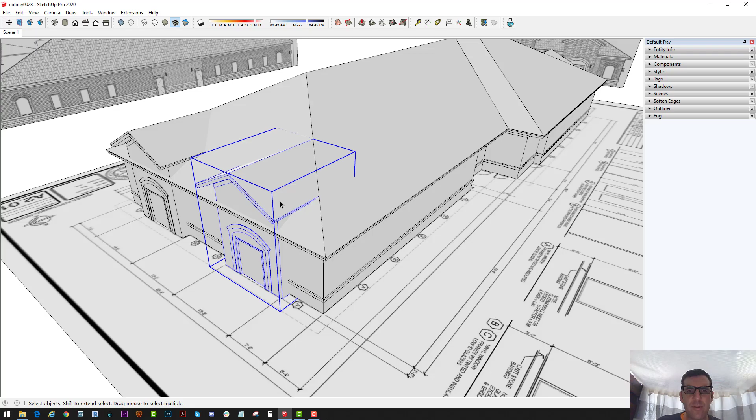Okay, so the first thing we're going to do in this part of the tutorial is clean up this part of the roof right here where this roof meets the other roof. Let me pull out View, Toolbars, Large Tool Set, pull it over to the side, double click.

So what I'm going to do is select this and select the Move tool, click on this face, get it going in the red axis, and hold down Shift to lock it - or the green, I mean - then hover over this face to snap that face together so that they're in line with each other.

Then I'm going to double click inside this component, use the line tool to draw and trace that. Might have to hover and hold Shift and snap it. I want it to cut, hover on this line, hold Shift, and snap it there. So cut that.

And then I'll do it for this side too. Hover on this line with the line tool, hold Shift, then hover on this line, this face. And it's doing it to all four of them. I'll just have to move those over where they need to go after I'm done.

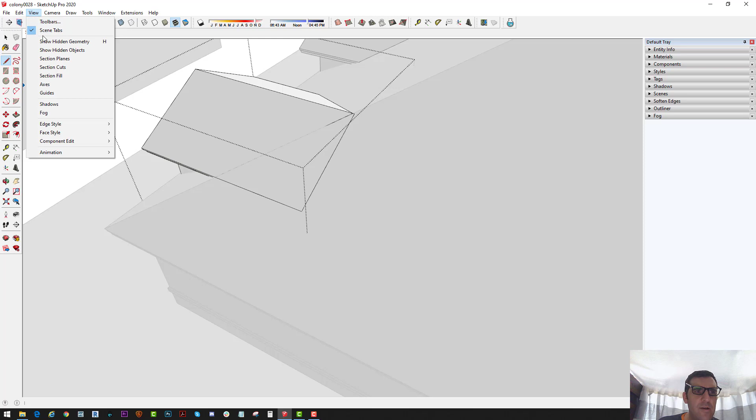The issue is I want to cut. For now, I think that's enough. So I want to be able to see back here, so I'll go to View, Component Edit, Hide Rest of Model.

So I'll just use my eraser tool to erase this back part. And then the roof should line up, and I'll click that again - View, Component Edit, Hide Rest of Model - to get it back. So I want to delete that line too.

So let's see here. This isn't lining up exactly correct, but it's pretty close. We're gonna call it good for now. We'll just hide this line, then hide this line for now.

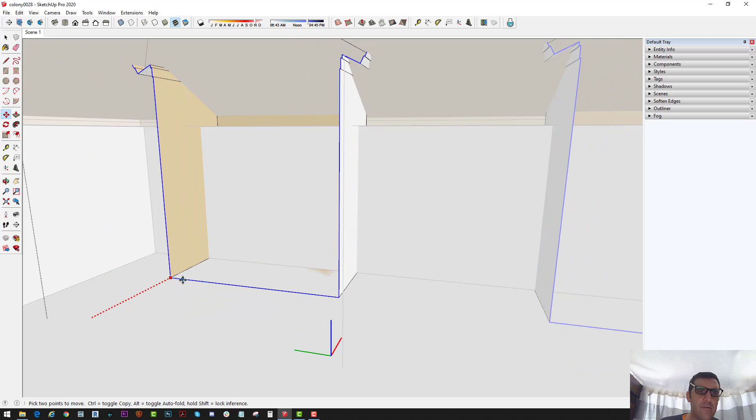We can select these and just pull them in a little bit with the Move tool, just so they're not sticking out so much in the building. Okay, so I want to pull these over to match as much as possible on that one. These, we'll probably just leave them where they're at because they don't need to line up with the roof.

So we do need to cut these roof parts out on all four of them. The best way I found to do that is to take this roof group, double click so that I'm inside the roof, and then draw a box - just draw a box like a square, then use the push-pull tool.

Now what I want to do is turn that into a group. So triple click, right click, make group. And then I can use the scale tool, select tool, scale tool, to just move that into place.

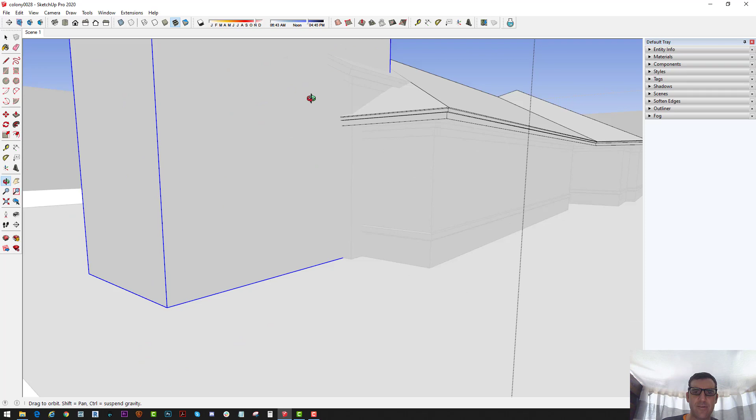So I can start cutting out these chunks of the roof that I don't want to be visible. And I'll just snap it to the edge of this element right here. There we go.

And then, since they're all the same size, I should be able to hold down Control, move a copy over here, and then do it again. Move, hold Control, and just put a copy over here, pull it out a little, and do one more copy. Move, hold Control, move a copy.

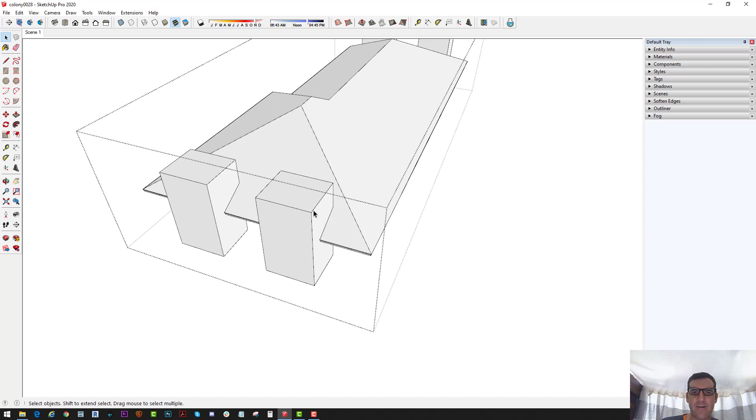So now, if I go to View, Component Edit, Hide Rest of Model, I just have my 4 blocks. I'm just gonna select all of these - the roof and the 4 blocks - right click, say explode, select everything again, and do right click, intersect faces with selection. So now it cuts those boxes out, and all I have to do is select it and delete them.

Delete all those extra faces that I don't want. Either select them and hit delete on the keyboard, or just use the eraser tool to erase the extra lines and faces that are not necessary.

It's like a Boolean operation, I call it, but I've noticed that if I use the actual Boolean operation in SketchUp, it's buggy - they may have fixed it over the years - but this takes me like a few seconds to erase the extra lines, and it's never been buggy like the Boolean tools have been, so I just do intersect and then delete what I don't want, keep what I want.

And then click View, Component Edit, Hide Rest of Model to show everything again. And there we have perfectly cut out spots out of the roofs.

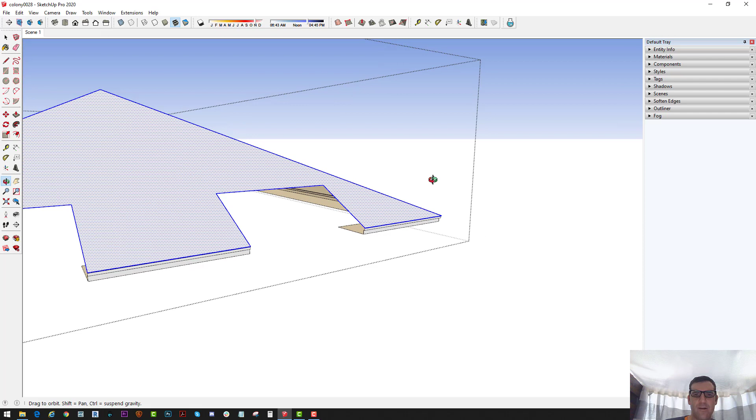We need to add back in these faces. All we have to do is double click on the roof, View, Component Edit, Hide Rest of Model, and use the line tool to just bring these faces - draw that extra line to bring these faces back to life here.

That's it. I don't think we need them on those ones. Oh, yeah, we do - it shows a little bit. So we'll bring them back over here too.

Okay, that part's done. So now we've got nice clean cuts in the roofs. All the elements line up the way they're supposed to.

We'll save it. That's the next version here. And we will move on to the next step, which is adding some extra modeling detail. So we have these roof vents, which are pretty much simple boxes.

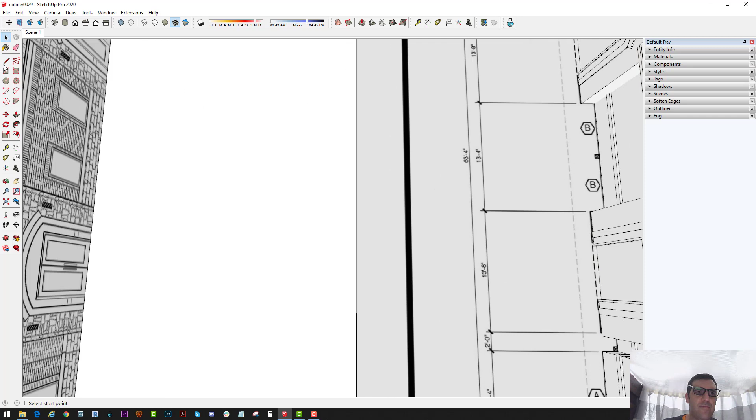To do that, just to keep it straight, we'll start off by drawing a simple box on the ground, push-pull it up, and then turn that into a component. Right click, select, right click, make component. Then we'll move it up to here to get the size correct. Move, rotate, scale, all that good stuff.

Just size it properly, and then do an offset, push-pull, eraser the stuff we don't want. That should be good. It looks like it needs to come down a little bit here in the top, like that. A little bit more. Okay.

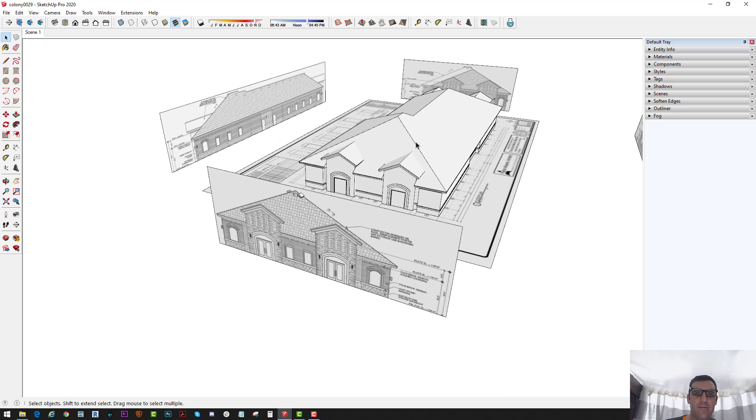Now we can see on this one where all those are placed at, but it's kind of hard to line it up. So what we can do is use the eyedropper tool. If we open up our materials window, if you don't have it, just go Window, Manage Trays, click on your default tray and add the materials. Then double click on the roof group, click on the eyedropper, grab this image, and click it over onto this surface. We'll do the same thing, grab this image, put it over here, so we can see where all those roof vents are supposed to go.

And then just move it over. I'll use the move tool, hold down Control and move a copy, and just keep doing that. But for this, I want to do an even array from here to here.

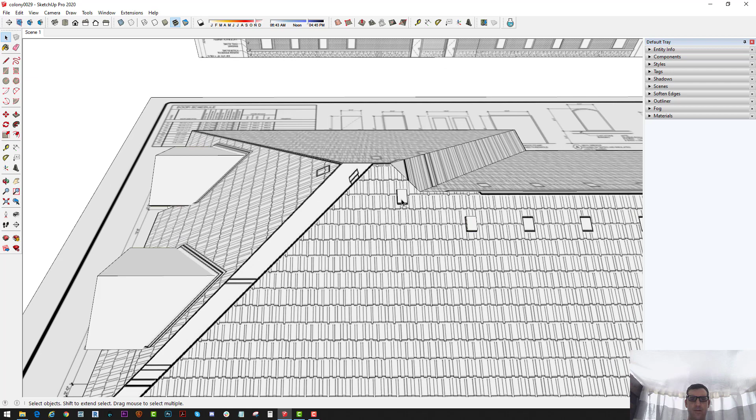Actually, this texture image isn't aligned correctly. Really, this should be over here. I don't know why it's not aligned properly. That should be centered, so really this should be over here. Oh well, I think if I just move this image over a little bit...

Double click on the roof, and then go back to the eyedropper. There, that's better. Still not correct. That's better.

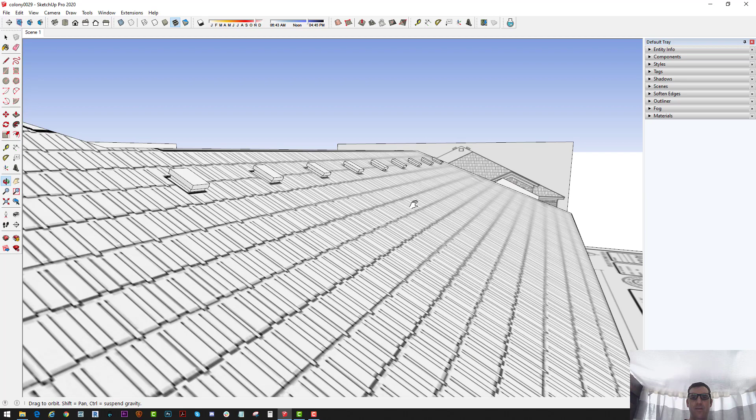So for an array, to get all these ridge vents evenly spaced, what I'll do is use the select tool, select that one, use the move tool, click once, hold Control, hold Shift to move it straight over, then click, and then type /8 enter. So what that does is take the space given between the first copy and the second copy, and divide it into 8 equal sections. So it's a copy array that keeps them all evenly spaced.

Now I'll just save it, because sometimes this next one crashes, but you never know.

So now I just want to copy all of those over to the other side. I'm going to select all of them, see if this will work. Just hold Shift, select, and then click on Rotate, and hover over the ground, hold Shift to lock it to that axis. Oh, it's not working. Let me see - I'll hover over this ridge line, click once, drag up to make it turn blue, then hover on this line, hold Control to do a copy, and copy 180 degrees. And then there, we've got them all copied.

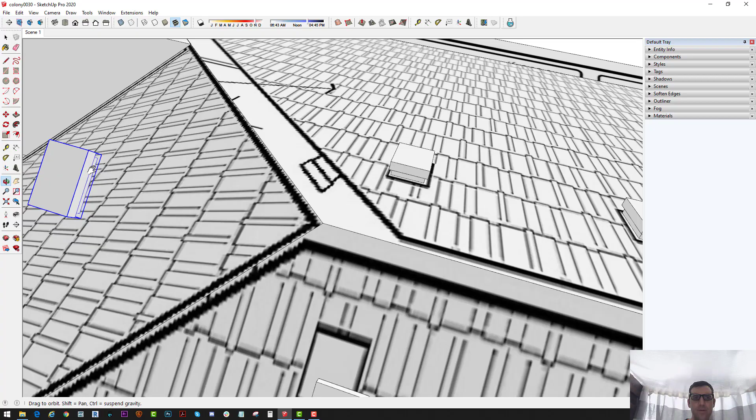And then I just move them into place. Should be even with the other ones. This should match this one. And then we need one more over here. Enter.

Move, hold shift, and then hover. This looks like it needs to move up a little. Okay, so we got our roof vent models done. Good enough, even though the drawings don't all line up perfectly. That's something we knew about already. It's okay, it's very close.

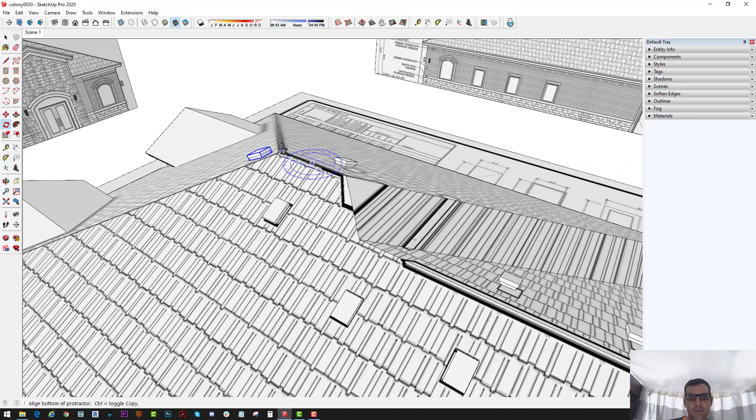It looks like if I look at this one, there should be another vent over here as well. So I'll use the rotate tool, click, hold control, 180. There we go. Okay, now we're good.

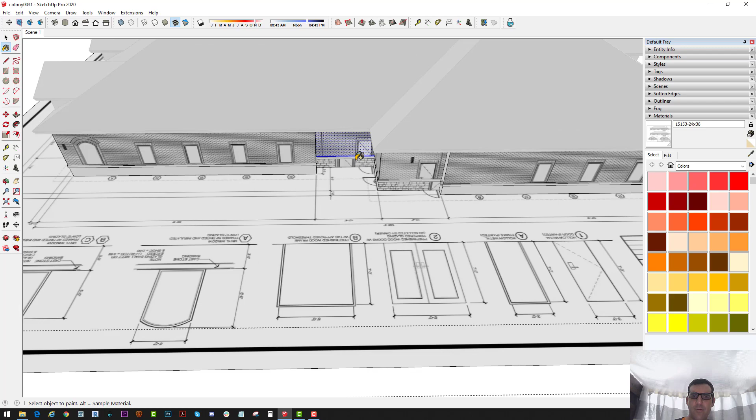That's just stone. It's a little bit messed up - oh, it's the wrong image. That's why. There we go.

Okay, so then I need to do these ones too, just so I can see where these lights are supposed to go. Yeah, looks good.

Okay, where's the light? So I can cut and paste this inside this component, and then it'll populate it onto all 4 components. Just move it into place.

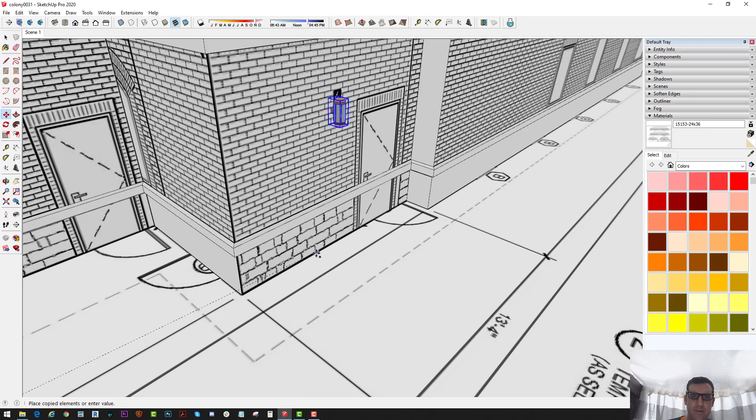Copy, because there's a few on the outside of the wall too. Rotate it 90 degrees, and then move it to snap onto the wall here with the shift key. I'm going to snap the height so all these heights line up, and then move it over to line up with the image. Then I could snap it onto the corner of the wall here, click Control to move a copy, and then just move it over and snap it onto this wall.

Just keep copying it around the building wherever it needs one. There's a couple here. Rotate, move, move, rotate, scale, move, rotate, scale.

Okay, oh, we missed one right there. Almost snuck by us, not so fast. And these don't line up, so I think it's actually supposed to be closer to the edge. Let's look at our other - yeah, this one's pretty close to the edge, so I think that one looks good. The CAD's a little bit off today. It's okay.

Okay, so we got lights, camera, action. The only thing left to model are the windows and the doors, as far as I can tell. We'll start with the windows. Let's save it first.

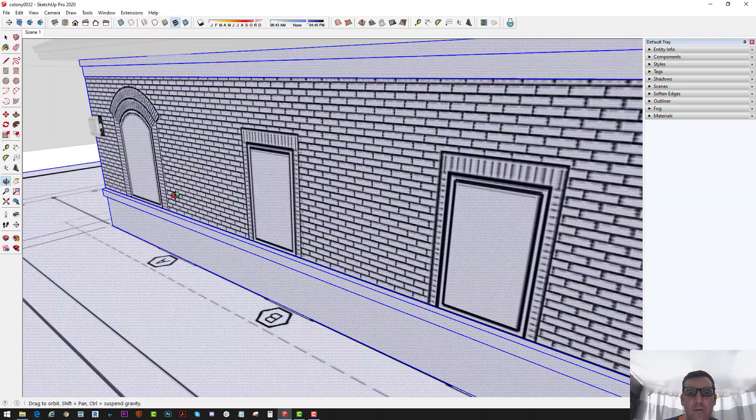Okay, so to draw the first window, we'll just trace it right onto here. And we got to double click on the wall, so we're actually cutting out this window. We want it to be cut out, especially this first one.

And then we can use the offset tool to make it more even here. Go into X-ray mode so we can see our lines better. View, component edit, hide rest of model. Pull down this line a little with the move, select and move tool. Pull down this line. Okay.

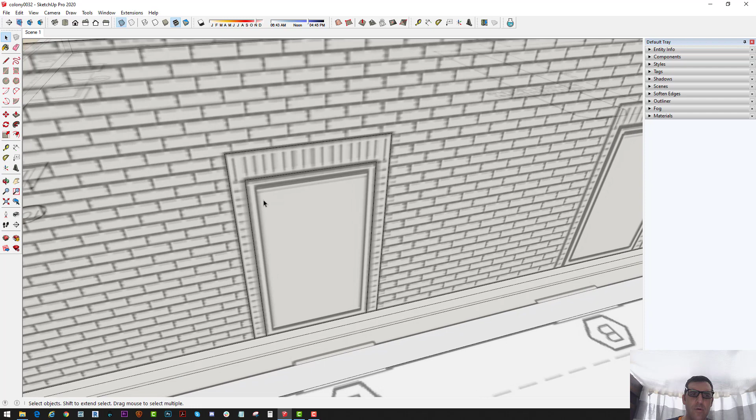Then we'll offset this by 2 inches. Click on the offset tool, hold, click and hold, type 2, enter, and that will give us our 2-inch mullion, as they call it. Then we just use our push-pull tool and push-pull this glass in, and then pull this mullion in.

Just get it to where we like it. That's probably - we want to pull this out, not too much. I'd say no more than 1 inch. In real life it probably would only be out 1/4 inch or 1/2 inch, but just to exaggerate it a little for the purposes of the render, you can exaggerate it if they're not using these to build the construction of the building.

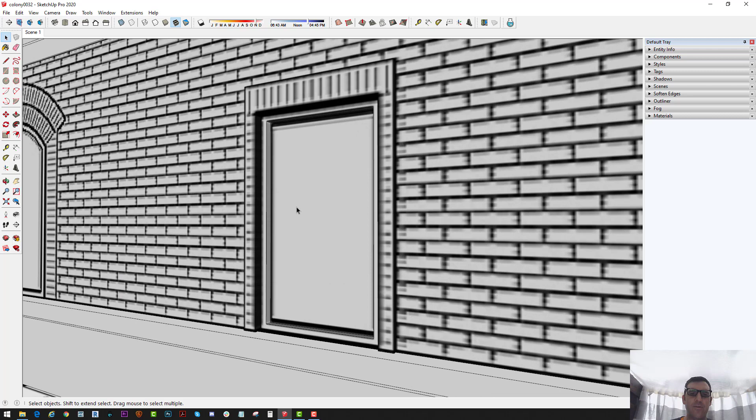I'm not sure what the final detail will end up looking like, but so let's get out of X-ray mode. So there's our window, but we need some materials, so let's go to the materials window, click on home, see what we got.

So let's just use the default white material. If they want to change it, we'll make the mullions a different color later when they let us know what color they want. For now we'll just leave it default. And then let's get a glass - let's do a color and just get a random color here. Okay, so

I do want to cut this all the way through the building. I don't like to just leave the windows laying on the surface of the building, because for the render you get some better reflectivity and refraction, whatever rendering program you're using, if you actually cut it all the way through.

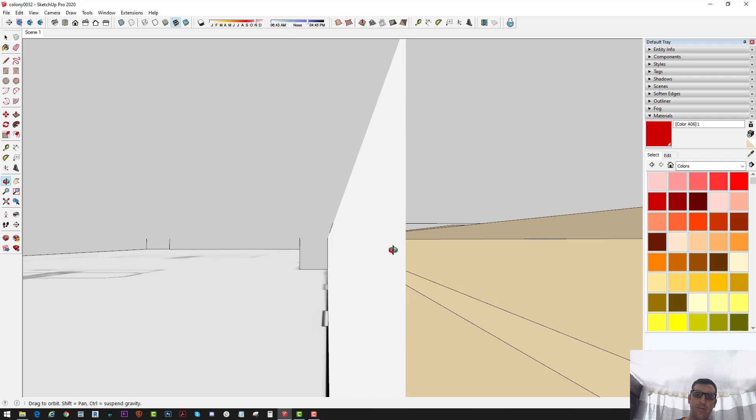So I'll draw this extra square back behind the window, just using the line tool, to extend the outsides of the window all the way through. It's going to create some extra geometry - just delete anything that you don't want. It's a little tricky because you're kind of modeling inside this wall, but it's a pretty big wall.

Now we can just select this face and click delete.

So that's our glass. I like to add the glass material to both sides so that it shows through really clear, so you get the clear glass going all the way through.

And then I like to make this window a little more realistic. So what I'm going to do is, before I do anything else, I'm going to select the window. This may be different than other people will do, but I found long term this works better. So I'm actually going to select all that geometry, click on it, hold control, and pull out a copy. This is going to be my actual window, and I'm going to work on it separately.

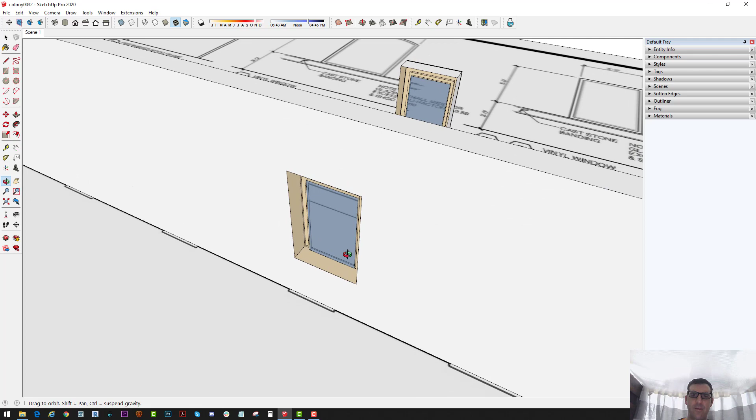And just use the eraser tool to erase all of this inside, all this geometry, because all I really need in the building is the cutout, because my actual window is over here. I literally just need a hole in the wall, because when I copy the window over, I want to copy those extra lines that will cut out the windows as I go. But then this is going to be a component, a separate component.

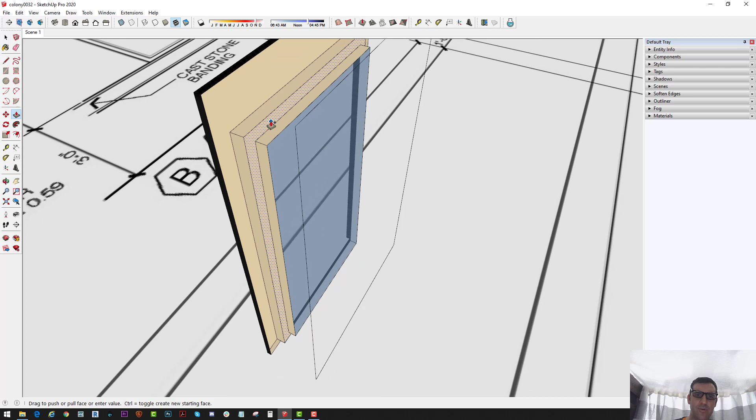So what I want to do now is, I don't need these lines, they're just unnecessary right now. You'll never see those, they'll be inside the building. But what I do want is to make this mullion bigger. So the mullion starts right here, and I can just use the push-pull tool and hold control to pull a mullion all the way through a separate piece. And it reversed this one face, but I can right click on it and reverse it back.

So that's correct, that's what I want. That looks good. The only thing left to do, actually, I don't think I want to cut it out this big, because that's where the brick goes. I should scale this down to just the size of the mullion.

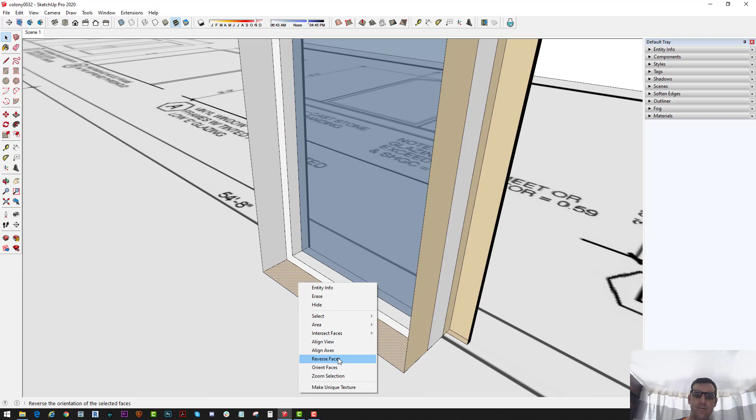Because when it comes through to the inside, there's not going to be a brick around it. There might be trim, but we don't need all that brick stuff. So I'll just finish the model. This is the part that will be inside the wall. And then I need to reverse these faces because you won't see this, this will be inside, this is the outside. Okay, I think that's what I want.

Now I just want to add a brick texture to this, but you have bricks going this way, and up here they're going the other direction, so I've got to draw a line to separate the texture direction right there, the direction of the brick. It's going to be the same brick material, but I'm going to rotate the texture 90 degrees.

So I've got the materials already in my scene. Should be this one right here. So I'll just right click on it, texture, position, and get this where it's supposed to be. Position it there. Then I'll hit enter, right click on this one, texture, position, rotate it 90 degrees. That looks good.

And now I can just eyedropper that material, eyedropper this over to here, and same thing on the inside and outside faces. And then eyedropper this underneath here and on the sides and the top. There we go, the window model is done. You won't ever see that part.

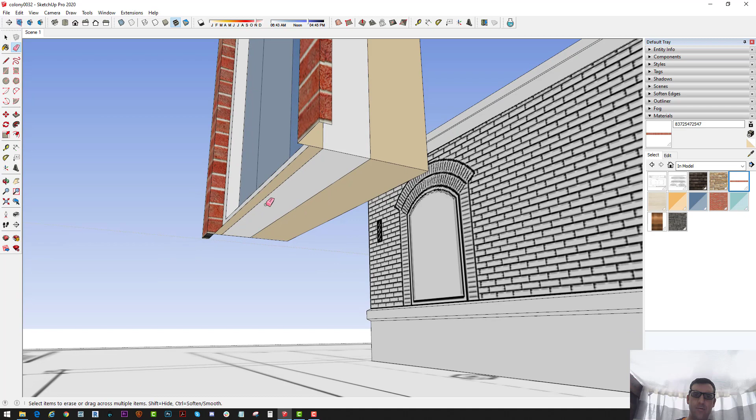Okay, let's select all of that, right click, make component. Okay, so now I can actually select these 4 lines and scale them smaller on the inside wall to there. That's all it's gonna come through on the window. Okay, now I'll use the move tool, grab the corner, hold shift, bring it inside, and there we go.

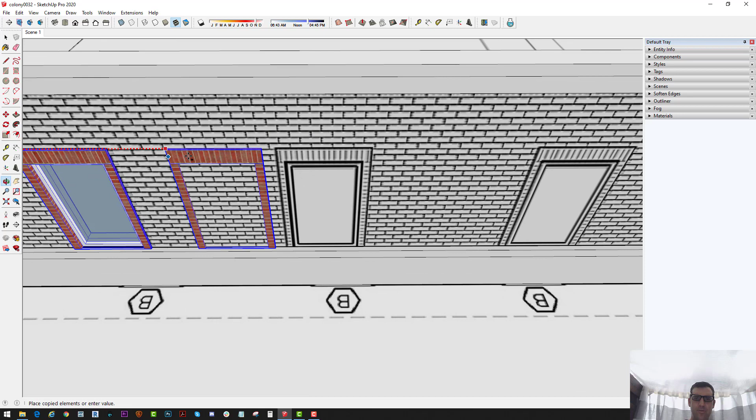Now, so this is the component, and if I copy it over, there won't be any hole cut out. But if I select around the window with the selection tool, make sure I don't select the floor, now it's selected, not only the component, but all the outlines that cut out the window out of the wall. So if I use the move tool now, select all the way around it, move tool, hold down control, hold shift to make it straight, and I pull it over here.

At first, when I click, you won't see that it cut out a hole, but if I click on the select tool, I can just hit delete and delete these 2 faces. Oh, this one I have to actually draw a little line to, because it didn't cut it out automatically. It brought over all 4 lines on the inside, but I had to just draw one, just snap it really quick to make that cut out. Sometimes that happens on a big face like that. When you're just cutting out a small hole, you just gotta draw a little piece of it. That's it, and then we just gotta do that to all the windows. I'm just gonna pause it because you don't need to watch me copy it 20 times.

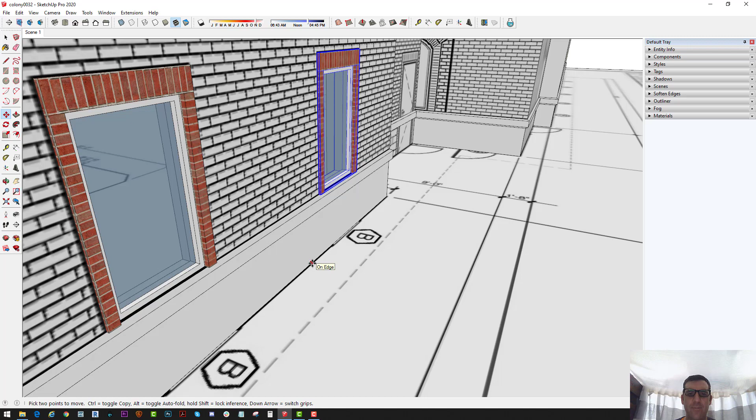I am going to show you a couple things. As I copy this window in a different area, like I did with the light earlier, I can click on the move tool, and as long as these walls are all nice and even, because we used the follow me tool to create the walls, I can hover over the line on the bottom here, hold down Control to make a duplicate, click, grab this component with all the outside lines that cut out the hole, and then hover over the line on this side of the wall, and it should do the exact same thing.

Now I can delete all these faces with the select tool and just hit delete. These, I'll have to just draw one line, and then it will create the face. Select, delete, delete, delete, delete. There. Now the other one is a little tricky, when you turn the corner to come from here over to here, so I'll show you that one too.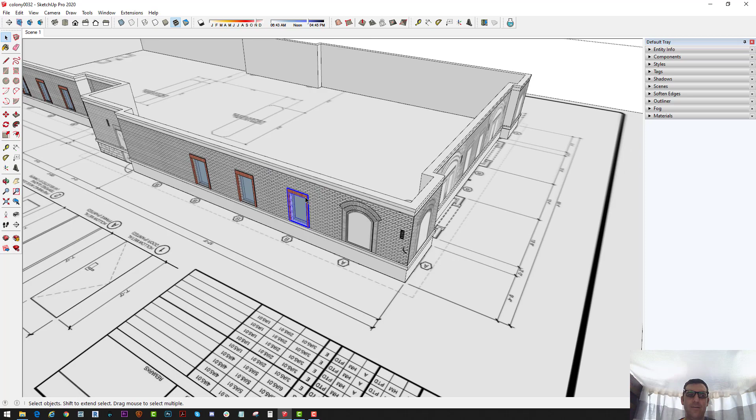So you just select all around this window, so you get the component with all the lines that cut the window out, outside and inside, which even if you're not doing interior renderings, it looks nicer when you have a cutout and you can see a little bit through the glass. Then you could put lights inside the building and have some light shining through, and have a lot better effects than just having a piece of glass sitting on the side of your building with nothing behind it. And then if you do decide, or your client says, yeah, I do want interior renderings...

Yeah, I do, I guess, yeah. And then you're totally ready to just start putting furniture in there, some trim and some interior walls, and then you can do interior. You don't have to worry about having these pieces of glass sitting on the side with really no walls on the inside or inside of the windows. It's all just messy. But now it doesn't take any longer, not much, just a few extra seconds here and there. Later on I think it does nicer interior or exterior renderings, and then you're ready for the interior later. So I don't do it just sitting on the outside anymore. I always do it this way now.

So for this, I'll select everything, hover over here, hit Control, copy, pull it out over here, rotate it 90 degrees. Then I'll use the move tool to grab this corner and just pull it in, and then move it over, and that's it. Should work just like the other ones. Okay, I'll hit pause real quick.

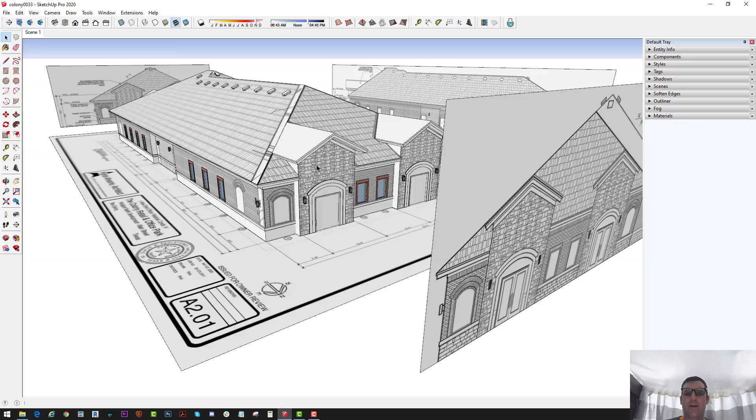Okay, so I've got the windows, the square windows, copied everywhere where they need to be now. Now we have to make this window that has a curve on the top. So I'm going to start by double clicking on this group and copying a window over with the move tool, holding Control, just to get a start on it.

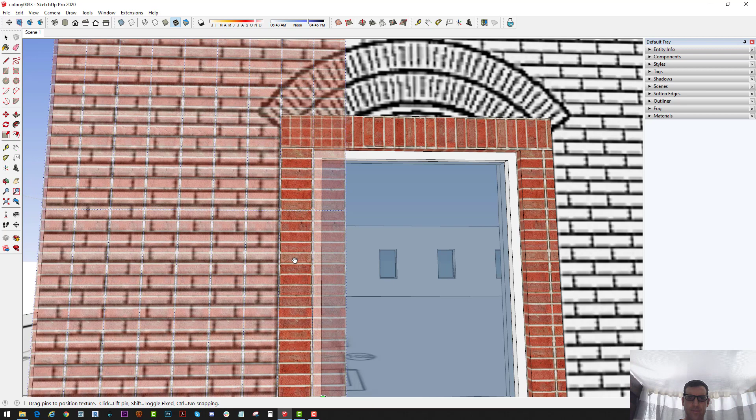So we don't have to reinvent the wheel all over again. What I'm going to do is explode it, then select these lines and move them over to line up over here. Use the scale tool. Actually, I want to deselect that, at least deselect that face, just to get... ooh, I don't want to scale. Let me delete this first. I just want to pull this edge over to be bigger. There we go, same thing with this side. And then right click on this face, texture, reposition this texture. There we go.

So now we have to turn this into a curve. For that, I'm going to use the push-pull, and I'm just going to get rid of this, push it into the wall, use the eraser tool, and just start over on this top part.

So first I'll draw an arc, and one thing is when you draw an arc, by default it has 12 facets or sides, but I want more, like almost twice that much, so I'm going to do 23. So when you click on the arc tool, you click, type in how many faces you want on the side of your arc, so I'll type 23, enter. So now when I draw this arc, instead of 12 facets, it's going to have 23. That's how many I think I should have for this to look good.

And then I'll use the push-pull tool, and we'll go to X-ray mode to make the tracing a little bit easier, pull it into this mullion area. Then I'm going to offset that by 2 inches again, just like we did earlier. Use the line tool to extend this line out to there.

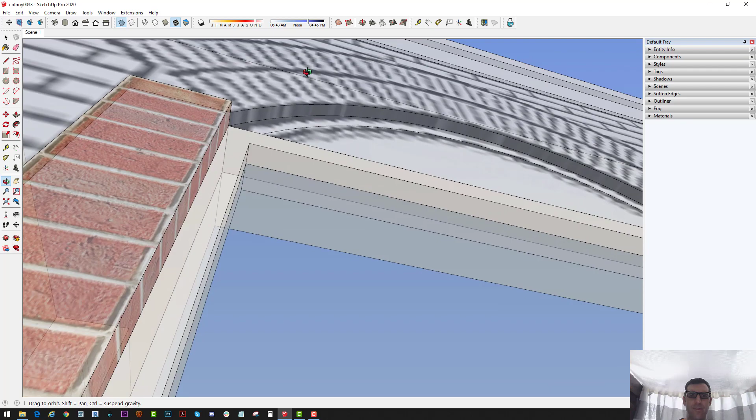Let's erase this line out of there. Actually I need to pull this line, draw a line going up, so I need to erase that line. Let's get out of X-ray mode here, it's a little hard to see what we're doing. This line needs to extend up, and as I'm going up, I'm going to hold shift and hover over this line so that it creates a nice smooth angle between that line and this line. Do the same thing over here. Click on the corner, hover on this line axis, hold shift, hover on this other one, and it does a nice offset.

And that's where we want our mullion to be, so we can erase that line and that line. Then use the push-pull tool. Oops.

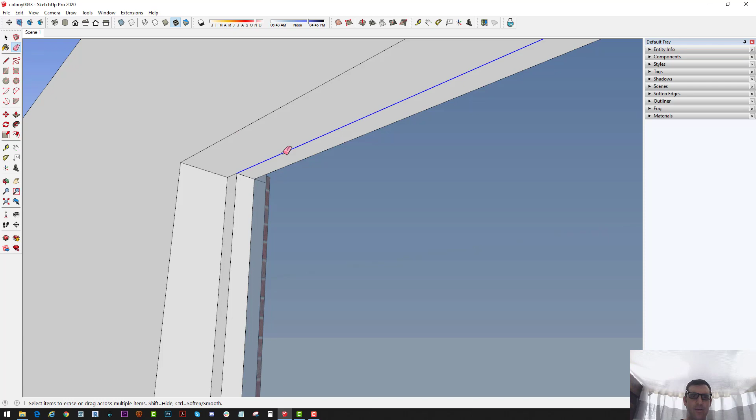What I need to do is copy that face to the inside of the building. So first of all, I'm just going to pull this down to get rid of that mullion, that's not in the correct place right now. So I'm just going to select this face, click the move tool, and copy it. Hold Control, move it over here. Now I can use the push-pull tool to pull it in.

Still need to copy this one to the inside. I'm going to copy the line though. I'm going to double click and then hold Control Shift click, so I'm just copying these lines to the inside. Then push-pull this back to there. And now we have a nice mullion, and we just got to erase the lines we don't need and add the lines we do need.

The only line we really need to add is one right here to make that glass go up, and then erase that line there.

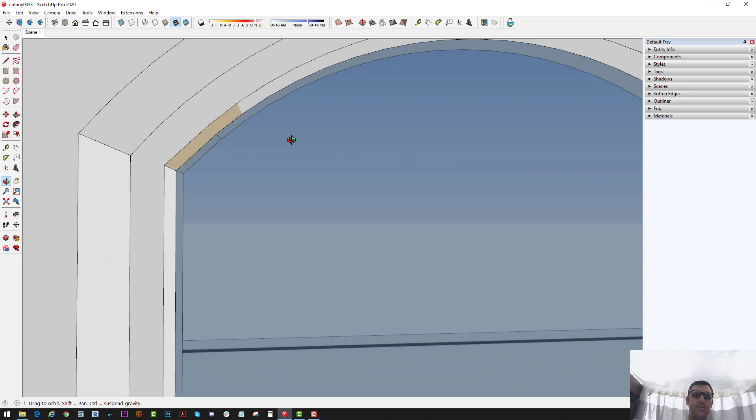And now this isn't really smooth, but there's a trick to smooth out this curve line here. Since this is a curve, I can't erase it because then it'll delete those two faces that are connected to the curve. So if I hold down Control while I'm erasing the line, it smooths it and makes it a soft line, so it's not visible and the light just curves around like it's supposed to. So instead of erasing, you hold Control, erase to smooth lines. You want nice hard edges on the corners, but on the curves you want it to be soft.

Because there's actually a whole bunch of lines, there's 23 lines in there. If I do view, show hidden geometry, you'll see all the lines. They look like dotted lines, but they're all smooth. So we want curves to look smooth, but it's all an illusion, all smoke and mirrors and a whole bunch of triangles going everywhere to get it to look like what you want it to look like.

So we're getting close. We've got the outside done, so we mostly just copied it. And we got the top of the window mullion and the glass is done. We just have to add these bricks and then this window will be done. So let's save our progress.

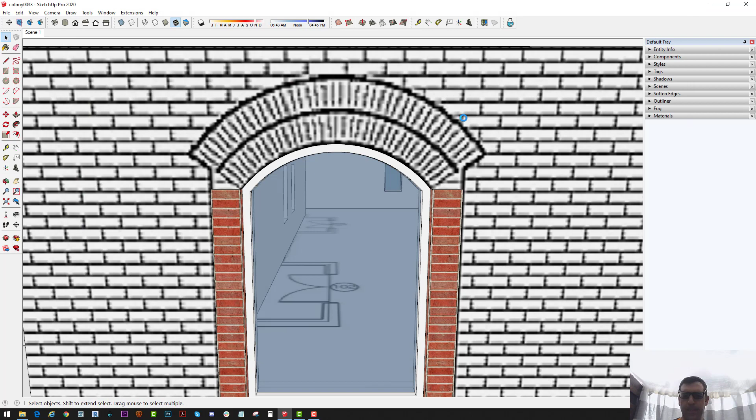So to start, we need two more curves in here. We've got one curve right there, so we're going to use the offset tool and just offset that curve twice. Once, twice. And then let's go to X-ray mode to finish out these lines. That's pretty close to what we want to see. We'll extend that line up. That's correct.

It's almost perfect. You don't want it to be too perfect because then it doesn't look real, because nothing real is perfect. So it's got to look a little bit off, right? That's my excuse anyway, why it's not exactly perfect.

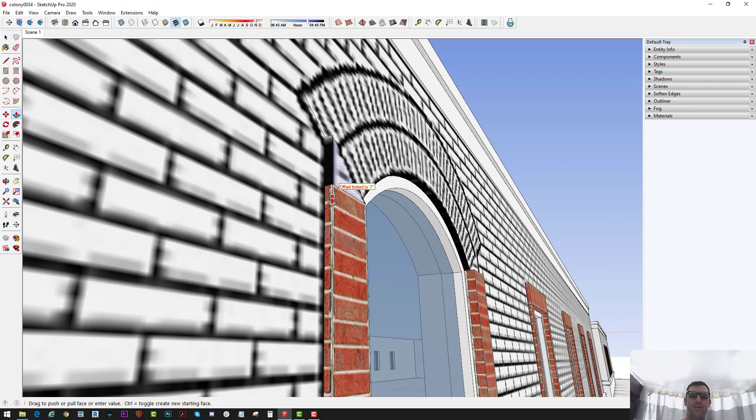Now I'm gonna push-pull those faces out to create that little bit of depth that may or may not be there in real life, but it probably will be a little bit, maybe only a quarter inch, but we're exaggerating it a little bit. And if the clients say, hey, that's not supposed to stick out that much, it'll cost too much to do that, then okay, we'll push it in a little bit. But it kind of gives it a little nice effect, a little bit of shadow effect when you render it.

And we don't really need, oh, what's that? I don't know what that must have came over from something else. We don't really need that. It should just be white default for right now. Oh, that's part. I don't think we want that. We want to erase that, don't we? Whatever, we'll leave it for now. Okay.

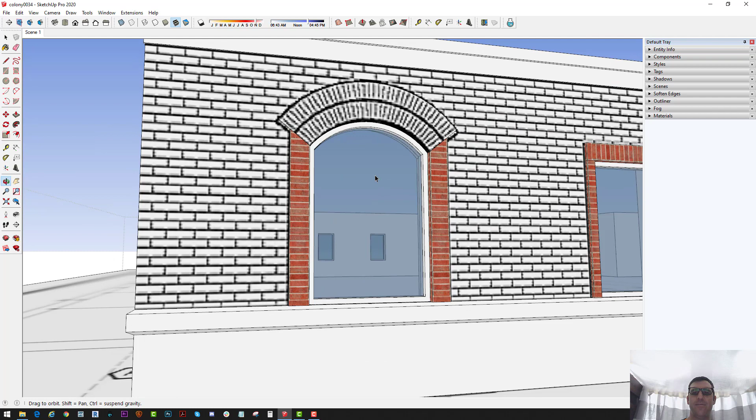Okay, so that cuts out that little piece, but we haven't cut this out yet, it's just part of the wall right now. So now the only thing left to do is the most difficult thing in this whole project: make these bricks look like they're actually curving, which is difficult to do in real life, and difficult to do in a model.

One thing we can do is, since there are these curves, I counted them out - 23 for a reason. I thought that spacing, if I just draw lines in between where these 23 segments of the curves are, would be about the same size as these bricks. So that number 23 wasn't just random - I actually looked at the texture and counted how many I think it should have.

So I tricked you if you thought it was all just randomness. I didn't really trick you, you probably weren't even thinking about that yet. But I've done this a few times in my life, so I was thinking, wow, it's gonna be hard - a lot of texturing and stuff.

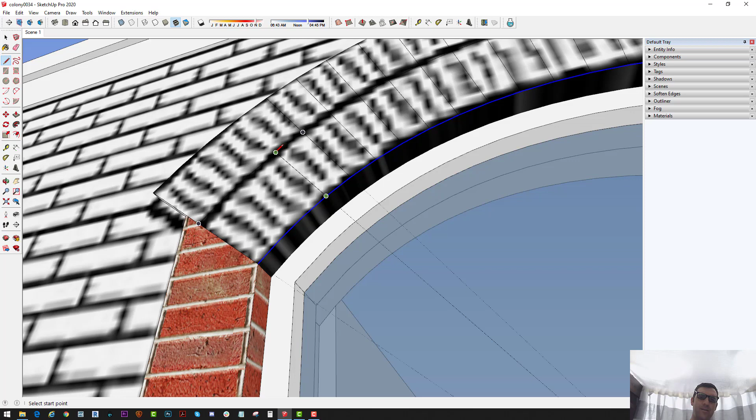And my bricks may be a little bit bigger - I mean, who knows, to me these look too small, these don't look like normal sized bricks. So I'm kind of doing what I think is best, and if they tell us to change it later, then we'll change it later. Oh well.

Okay, so for now, I just want to get this material to be just default, so I can see the lines more clearly and see what I'm working with, and get that texture on there a little better as we go here.

There's a couple tricks I learned over the years for how to do this - it used to really kick my butt trying to make a curved window brick pattern like this. But believe it or not, this won't be too difficult, because we used a nice arc with the exact same size segments, and then used the offset tool. That's going to work really to our advantage, because all we need to do is texture just two of these bricks, like eyedropper that, and then position this texture properly twice.

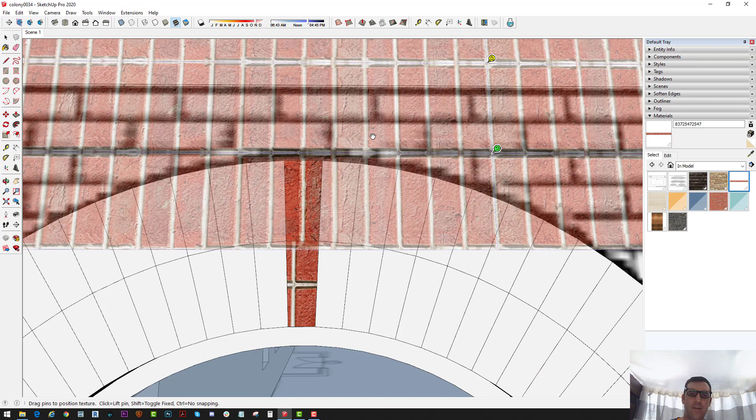I think you're catching on. We have to make it the right size. Ooh man, it's kind of big. And maybe 23 wasn't the right amount - maybe it should have been 30.

I think it looks pretty good though. We'll see what people say later.

So we want to resize this texture onto the face, and this is all going to be copied, so it's kind of like a tiled texture, but in a curve. So it's kind of complicated, but I think we can get through this - if we put our heads down and dive into the wind, we should be able to push through this storm.

Oops, kind of screwed that up. Okay, I think that's good enough - I got enough that I like it.

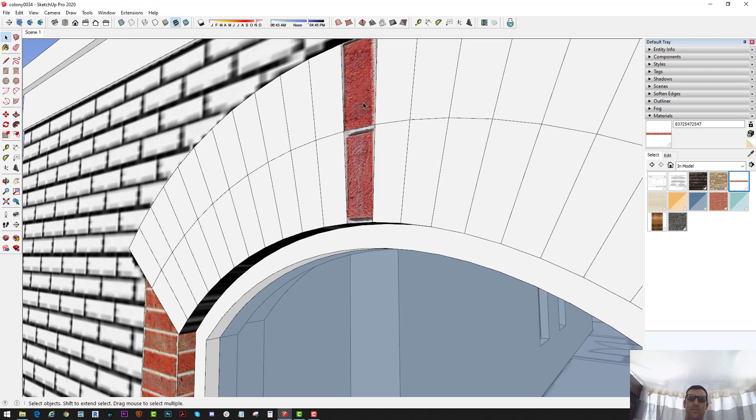So what I'm going to do is shift click these two faces, right click, make component. So I'm going to make that actually into a component. Then I'm going to do something that you're going to think is weird, but I'm going to delete all these faces because they're just in our way now.

That was bugging me a little bit, sorry. Then all we have to do is just copy and rotate this component. Copy, rotate, copy, rotate.

And since the curve is contiguous and tangential, whatever you call it - yeah, something like that - I should be able to copy as many as I want and not have to do one at a time. It's nice when a plan comes together.

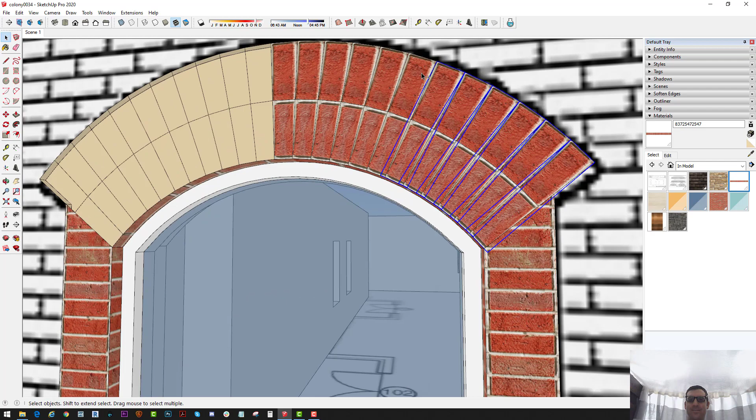Now watch this, I can do half of the curve all at once. And then the computer crashes - no, please don't crash when it looks so nice! Okay, it's not the Mona Lisa, but I think it looks pretty good.

Let's save it before it crashes. I mean, save it because it's a good idea to save.

For some reason, SketchUp used to crash a lot when I did copy rotate. Almost 50% of the time, I'd say 40 to 45% of the time, whenever I did copy rotate something, it would crash. So now, whenever I copy and rotate something, I get scared. I have PTSD from it.

Let's reduce the size of this texture. One really cool thing now that all these are components, if I mess with the texture, all of them will change.

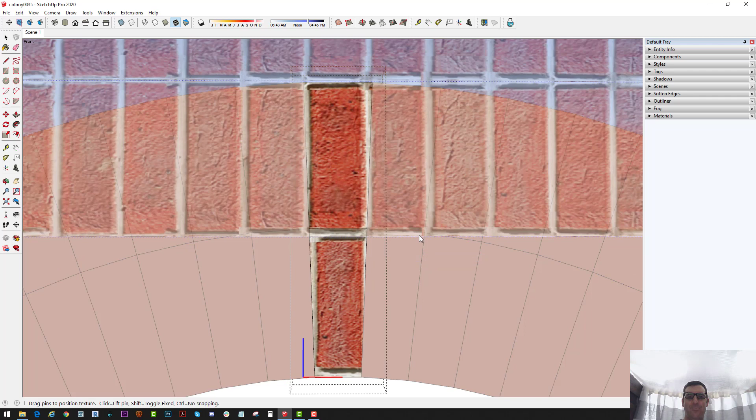It's all part of the master plan. It's all part of the destiny. It's our destiny.

There, I think I like that. Now, I really want to just hide these lines. So to hide lines, you can use the eraser tool and hold down Shift, and you can just hide these lines.

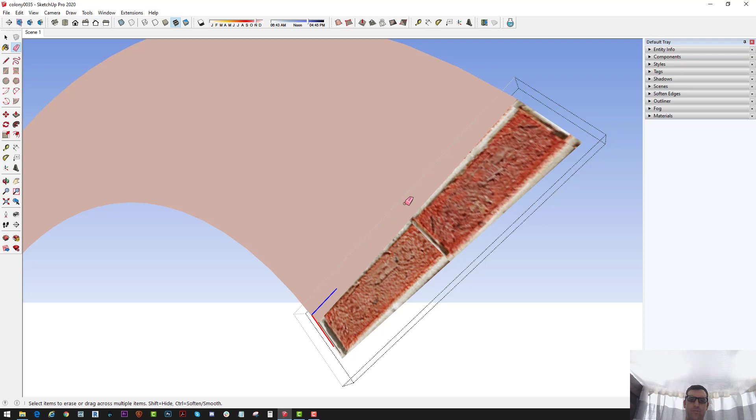It's not softening. Hold Control with the eraser tool to soften edges. Shift held with the eraser tool hides lines.

And then really, I just want to delete these extra lines that I don't need anymore. They're just in the way, giving us illusions. Now it looks better.

Except we need a little more texture. Where did I go wrong? Where did I go wrong? Okay, I like that. Right there.

Now, we still haven't turned that into a component. It's just sitting on the wall. Like, these are components, but it's just sitting on the wall. We need to do what we did earlier. Let's save it.

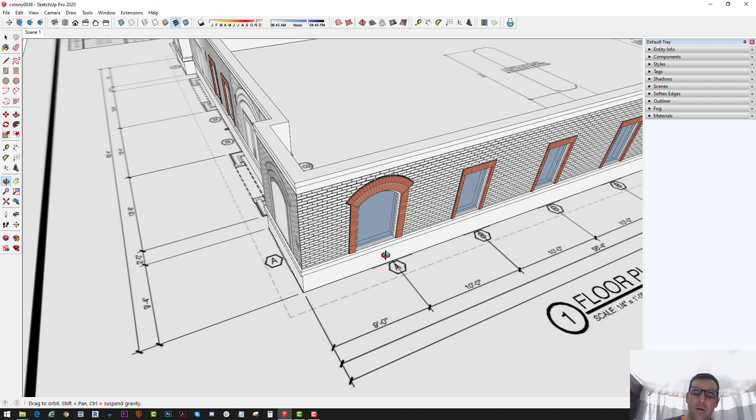So select all around it with all these lines. Make sure we're not selecting anything else behind it. And let's hold Control, move a copy. That's everything we want. Oh, we don't actually need those, doesn't do anything for us right now. But that's the whole window right there.

So we'll just select it all, right click, make component. That's our actual curved top window. Now we just gotta delete all of this. I'm gonna go view, show hidden geometry, and delete everything inside of this wall. Oops, but not the wall itself. And I want the cutout to still be there.

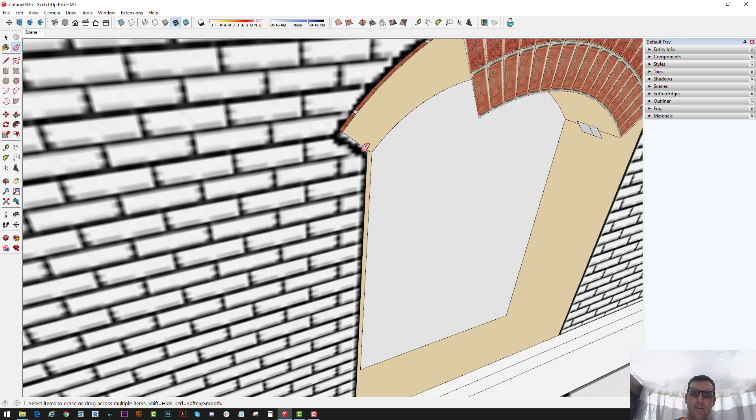That's important when I copy it, that the cutout is still there. And I can get rid of this because it's part of the window now. Yeah, just like that. Okay, so we've got the cutout and we've got the actual component now. Now we'll move it back, grab that corner, drag it back, hold shift, move back to where it's supposed to go, snap it to the wall, view, show hidden geometry. Now we've got all the lines for the cutout and the actual component itself.

So let's try to select it and then move, control move a copy over here, rotate 90 degrees, move, pull the corner. Ooh, okay, gotta line it up a little better first. Okay, something close to that. Doesn't have to be perfect, just I don't want it to go into the wrong wall.

Then it will get stuck. Trust me, if you don't believe me, it will get stuck. If you move an object into one wall and you try to move it to a different wall, your model will get ruined. Trust me, if you haven't experienced it, it's not fun.

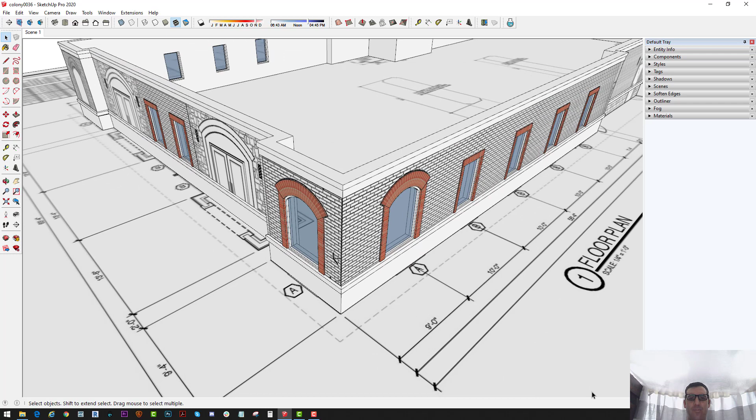Okay, I'm gonna pause it because you don't need to see me keep copying that thing all around. Okay, so I copied that window around everywhere it needs to be. So now we have two more things to model. They're both doors, the side doors and the front doors. So let's do these side doors first.

So the first thing we're going to do is copy over a window because it has the same treatment as the window, it just goes all the way down to the floor. So start by copying this part over, and then we'll right click, explode it, and then pull, just select those faces, pull them over to the side. Then we'll select the top faces, pull them down.

And let's delete these faces first. We don't need this glass, so let's delete that. Just delete anything we don't need, just to keep it out of our way. So it's getting closer. We need to cut out all this part down here.

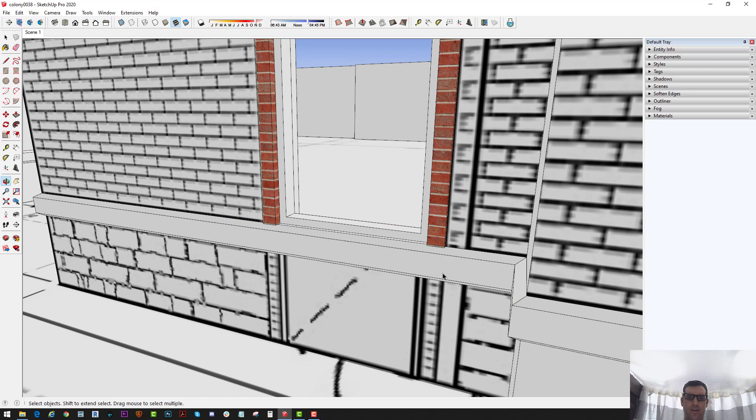So like we did with the roof, we can just draw a box all the way around this area and then do intersect with selection. Just draw this box that goes all the way through.

So actually first what I'll do is I'm going to delete everything except this one face, and I'm just going to make edit, make group, double click, and then use the push pull tool to make it a bigger box. So view component, hide rest of model, so that I can just make this box bigger and cut it out, cut out this whole thing, this whole bottom half, and leave the top half because the top half is correct.

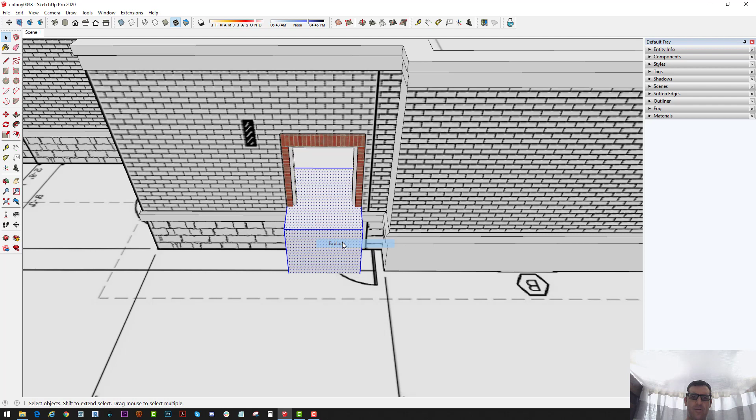Okay, here we go. Let's do view, component edit, hide rest of model. Select all this area, right click, explode, select this area again, right click, intersect faces with selection. Now we just start using our eraser tool to delete all the things we don't want.

I think I might have messed up a little bit because that's the brick area, so I want this inside the line. Just delete these other ones. Delete. Just use the eraser tool to delete all the extra stuff we don't need anymore, and then use the line tool to draw back the things we do want.

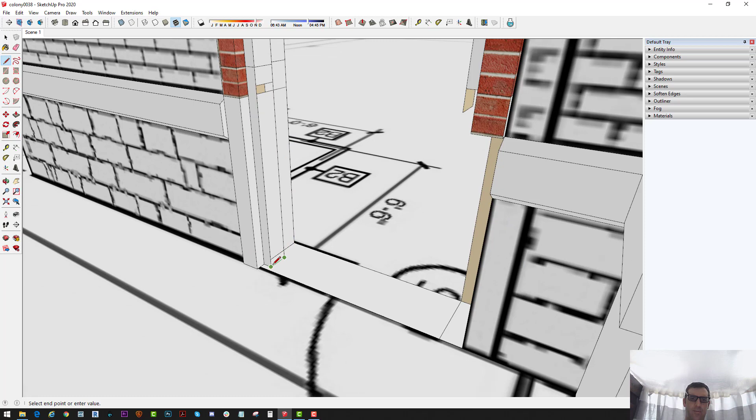This is a little messy here. It's okay, we just gotta keep drawing lines until it all makes sense. We don't really need these lines. Oops, I don't want to get rid of all that stuff.

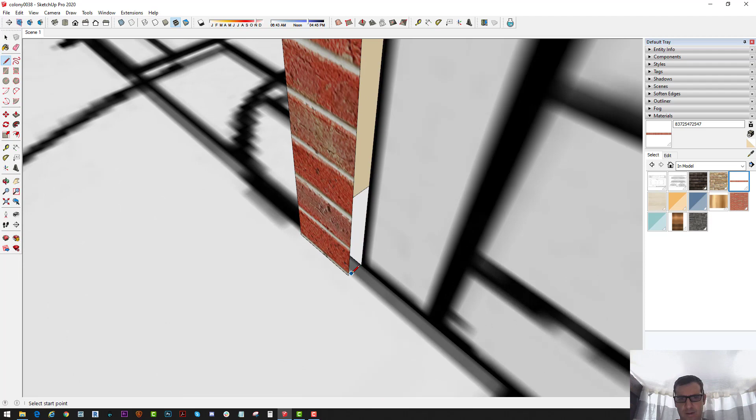I don't want to lose my texture. I'll just use the eyedropper to make those come down onto this face, these faces here. Oops, too much, too much, too much. Now, one more line here. Okay.

Ooh, we'll just leave that for now. Okay.

What I'm going to do is I've got some doors from a different model. I'm not going to model the doors again, I'm just going to bring them in from a different model and stick them in there.

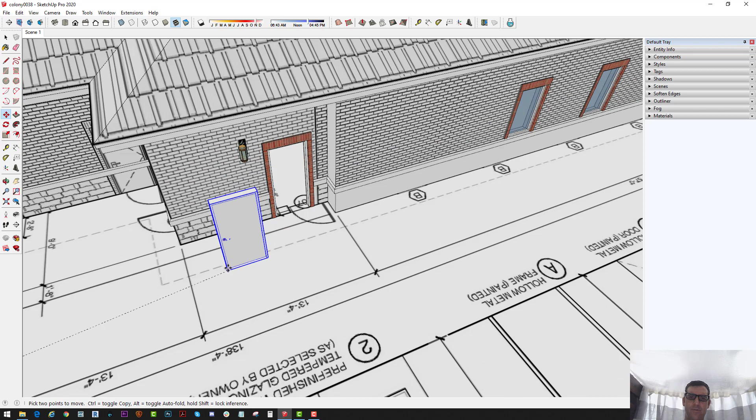This already has the outside part, so I can get rid of this. This inside here, I don't need that. Right click, reverse face. There we go. Oops, no, that wasn't right. Oh, it's missing it. Just draw a line here. There.

So if I just move this into place, we'll just fit it in here, squish it in place there. Just a generic door, basically.

Now what we have to do is the same thing we did before. Actually, I should paste this in the inside here so that we can do the same thing we did with the windows. When we copy this door over here, it should copy all the extra lines we need to make that nice clean cutout. So let's save the model and try to copy the door, see if it works.

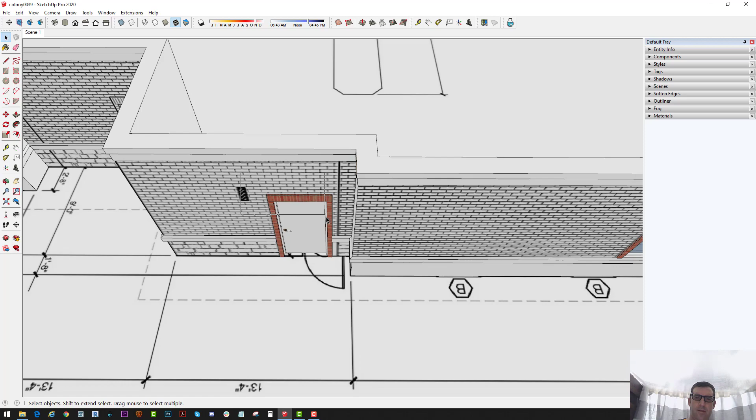Select everything around the door, including the door, and then move, hover over this line, hold Control, move a copy over here. Now, in theory, if we erase all these lines, the door should appear. It worked! Yay! Oh, it worked so good. Okay, I'll have to copy those two doors over there.

Okay, I copied those doors around where they needed to go. Now we just need to put this door inside this component here. Copy and paste, and snap it in here, and make the size match the drawing.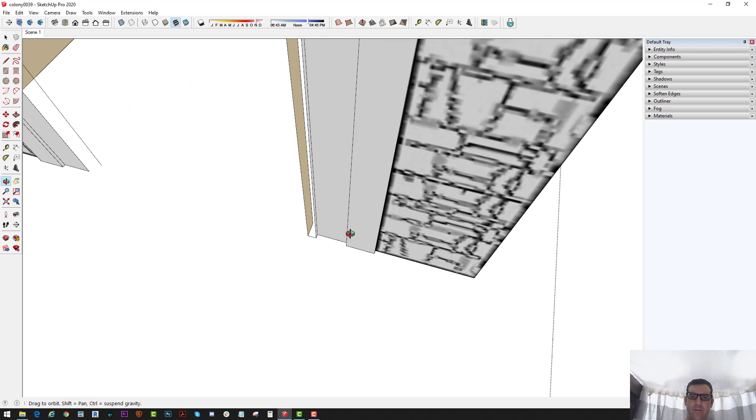Now we want to just delete all this extra stuff with our eraser tool, because all that stuff is modeled onto the door component. So delete extra stuff. Put that on the to-do list.

Hold Control, eraser, soften edge of the curve. Hold Control, eraser, soften edge. Push this back in. Pull it out 1 inch. Oops. Don't need the help desk right now. Okay, there we go. Alright, alright.

That is it, the model is done. We just gotta click the textures onto the building and then it's done. Let's save it and click our textures. That's the final little step.

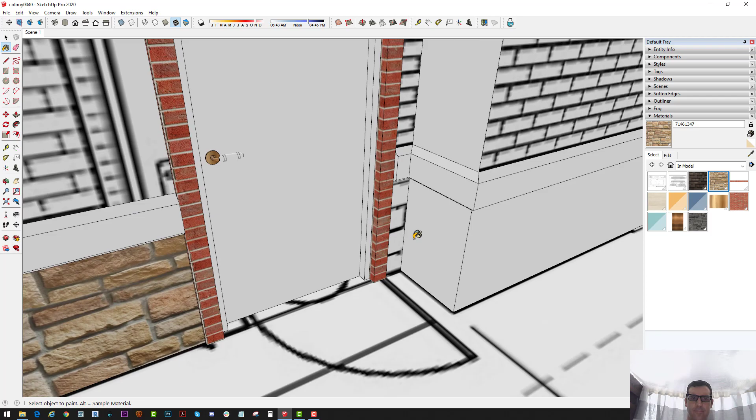Okay, so here we go, materials. So here's our stone underneath. Then we got our stone ledge, or smooth stone ledge. We also need to add it in this little piece in the windows right there, on both types of windows. There, looks good. Just click, click, and apply it to the faces.

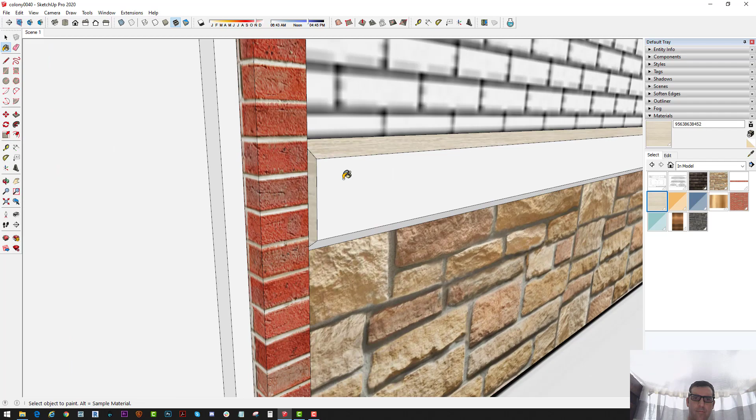Next is the regular brick, that'll go around the middle part. And then next we have the soldier brick up here. Let's pull that texture down into place.

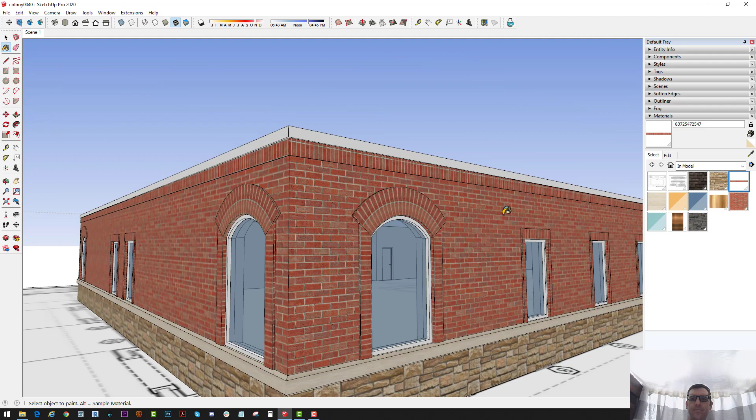And then eyedropper that so we can get that same pattern to wrap around the building so the bricks aren't off in the wrong spot. Ooh, that was weird, I'll re-eyedropper it. Sometimes it loses its eyedropperiness. Oh, just like it did there. You gotta re-eyedropper, it only lasts for so long. And then it gets tired, you gotta give it a pep talk.

Okay, let's add the stone onto this one. There we go. Let's add the roof shingles.

Ooh, these roof shingles are too thick here. I have to reduce that. Or maybe that's supposed to be white. So I kind of messed that one up a little bit. Let me fix that.

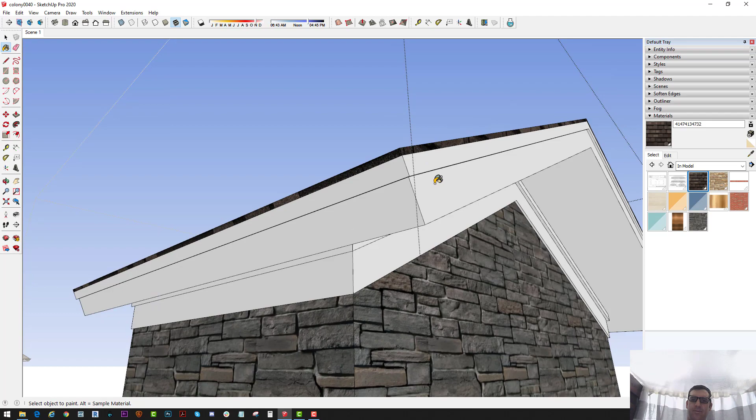So what it's supposed to be is if we just pull this down a little bit, copy those lines down, no more than an inch, somewhere in between a half inch and an inch, just to give the shingles the look like they have a little bit of depth, like they're actually, I'm exaggerating it, but they might only be a half inch in real life, or even less.

But it gives it kind of that feel of there's actually something sitting on top of your roof. It's not just a texture, because in real life it might only be that thick, but I don't want to worry about it too much. I just want to give it a little bit of depth.

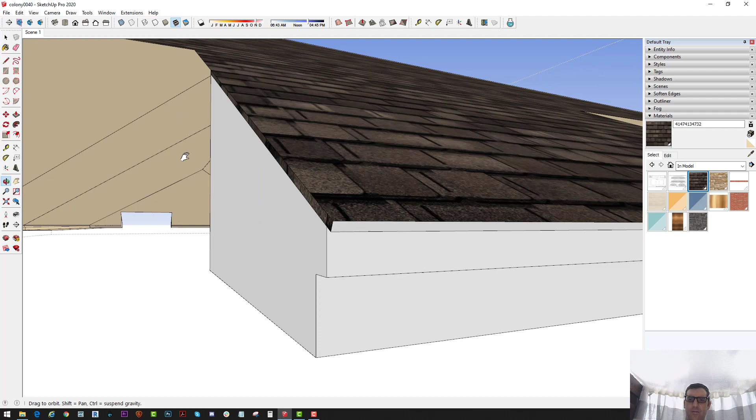And then we'll add the shingle texture to this top roof. And I think that's done. This model is totally modeled and textured. I think so, unless I'm missing something. I'll have to check it, see if I missed something that could give it a little bit more definition, make it look better. Might be okay, I don't know.

Hover, get that snap, hold shift, hover over this line, make it straight even with the other one. Line, click, hover, hold shift, hover. Should turn like a pink purple color when it snaps to the parallel direction as the edge above it, the different edge that you're trying to copy the direction. Okay, how's that look?

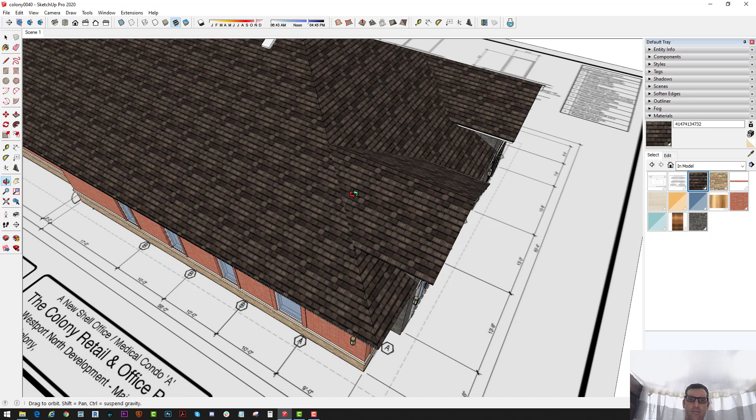I do kind of want to hide these lines in here. Shift erase to hide that line, and then hide these lines. Just because there really wouldn't be a line there. I mean, it's not going to show up in the rendering, but it bugs me a little bit. There, yeah.

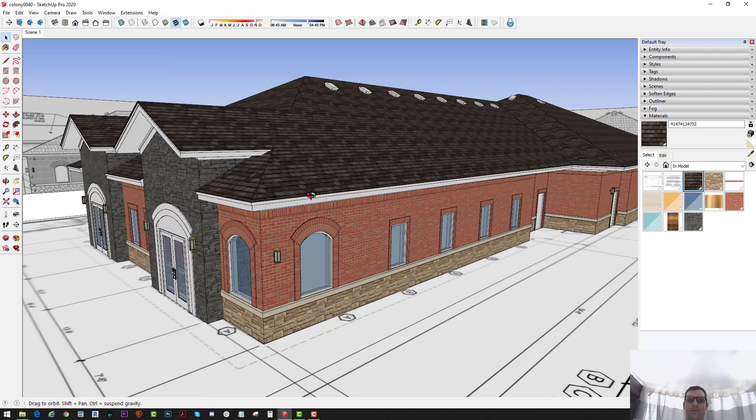I wonder why it's not lining up. Oops, I don't know what just happened. Try to get this lined up better. It's close. There we go, that looks... oh, that looks good. Wow. Why am I acting so surprised?

Let's save it, since it actually looks good. In case we mess it up, you can always go back to a previous version. Now let's try to line up this side. Oops.

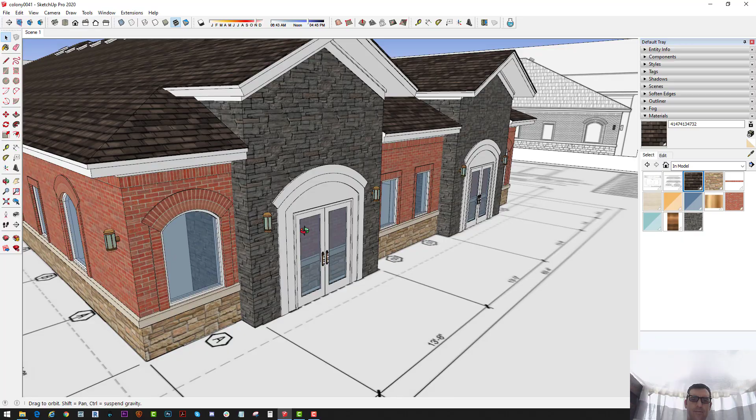Oh yeah, that looks good. Okay, I don't like having that building showing through the doorway. That will mess up the render, won't look as nice with the reflection, so we'll just have to cut out a little chunks of the building, so it doesn't look like you walk through the door and then you run into a brick wall. Boom!

Other than that, I think we're good for now until the client looks at it, changes the colors, asks for additional design things, maybe. Let's see.

Okay, so this doesn't have to be as accurate as it was before, but what we want to do is cut out some chunks of these. So this one, we can just cut out a big chunk of each side of the building. For right now, it doesn't have to be super perfect, just so that it doesn't show through in the rendering. Just delete these inside walls there.

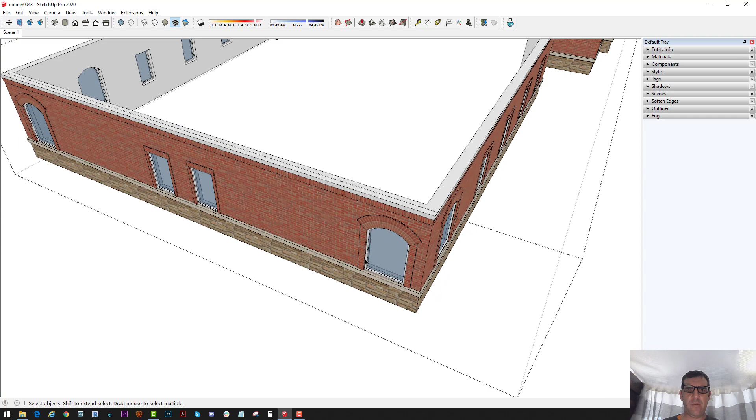That's better. Now for the building part, we're going to do the same thing as we did earlier, just make some boxes and intersect faces. So just draw a box. And get my tool set here. Push pull.

And right click, make it a group. Pull it through. And make sure it's close to the same size as the towers are, so that it's cutting out the proper amount of the wall. And then just move, hold down Control, copy a few boxes around, and do that same intersect.

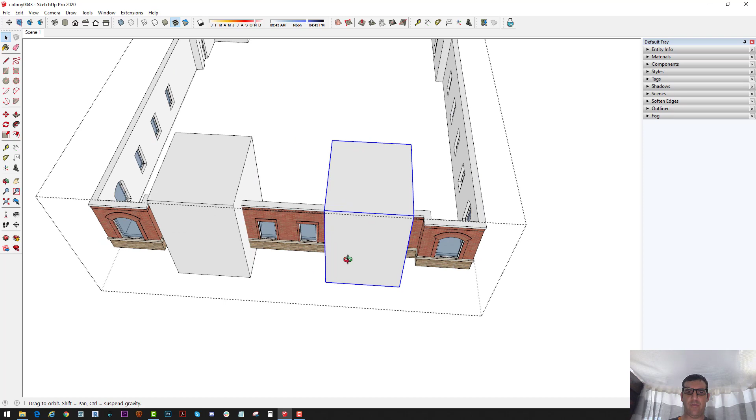View, component edit, hide rest of model. And we want to be careful, we don't want to explode all these windows, so just select just the walls and these boxes in these four little areas, then right click, explode, then select it again, these four little areas, nothing else, right click, intersect faces with selection.

Oh, something happened. What was that error message? I didn't read it. That's weird. Oh, because I have to select this outer face. I was only selecting the inner faces and it wasn't working. I've got to select the edges of the boxes. But not this window. It's very important.

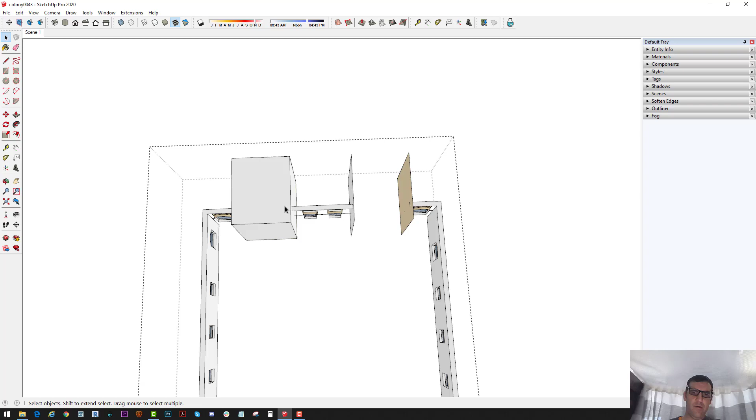The windows are good the way they are. Okay, this should work now. Right click, intersect faces with selection. I should be able to select and delete these four areas. Ooh, didn't want that to happen. It's weird. I'm not sure why those lines didn't create themselves.

Let's... strange, huh. These whole sides aren't wanting to work with the intersect. I'll just try doing one at a time. Somehow I deselected, I don't know what happened.

Okay, let's try deleting that. Okay, looks good. No, we're good. Okay.